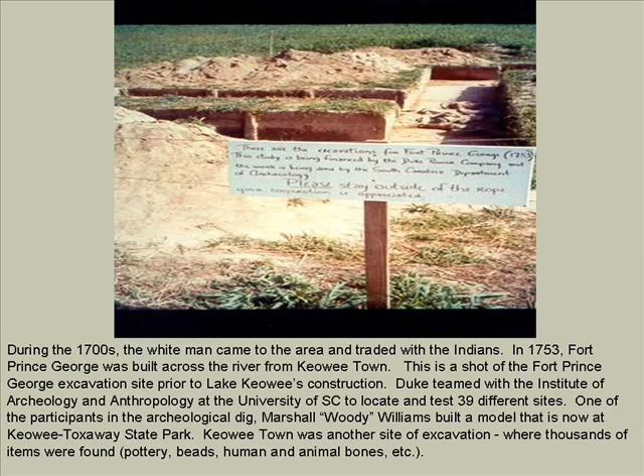Land purchases began, and South Carolina Land and Timber was formed for the purpose of acquiring, holding, and developing land and timber properties in 1963 and early 1964. The corporate name was changed to Crescent Land and Timber in March of 1966.

On Saturday, January 2nd, 1965, Duke's president, W.B. McGuire, held a luncheon press conference at the Clemson House and announced the company's intentions to obtain the necessary licenses and permits to build a large power-generating complex to be called the Keowee-Toxaway Project.

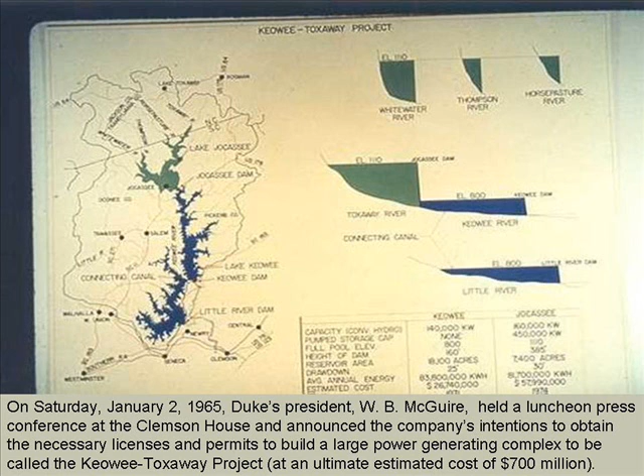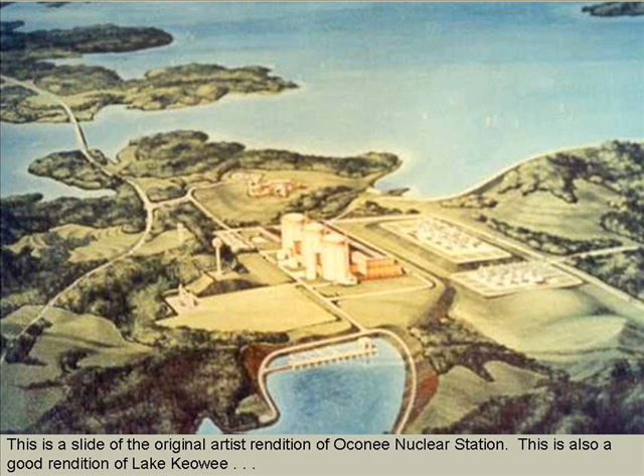In July 1966, Duke placed one of the largest orders for land clearing and allied machinery ever given in the two Carolinas with Jeff Hunt Machinery Company of Greenville, South Carolina, to clear the basins of Lakes Keowee and Jocassee. Clearing operations were scheduled to begin January 1, 1967.

In 1967 alone, the harvest of timber from company land being cleared for the lakes was enough to build over 2,800 six-room houses, and the pulpwood harvest was enough to fill 3,850 railroad cars. After an area was cleared, brush and leftovers were burned.

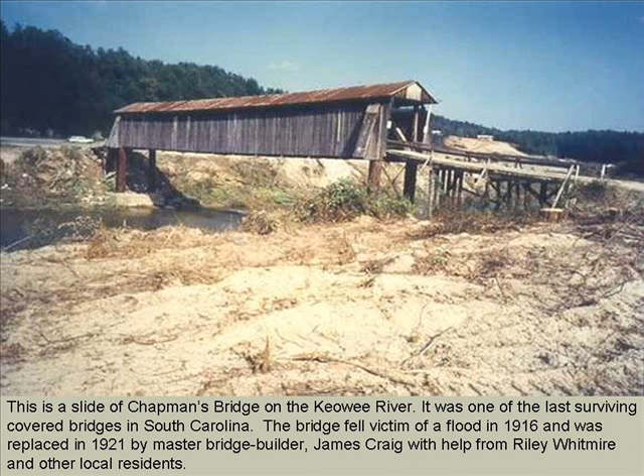This is a slide of Chapman's Bridge on the Keowee River. It was one of the last surviving covered bridges in South Carolina. The bridge fell victim of a flood in 1916 and was replaced in 1921 by master bridge builder James Craig with help from Riley Whitmire and other local residents.

Before Lake Keowee was flooded, Duke Power carefully dismantled and moved Chapman's Bridge to the Keowee-Toxaway State Park. Sadly, the bridge was burned and is no longer there.

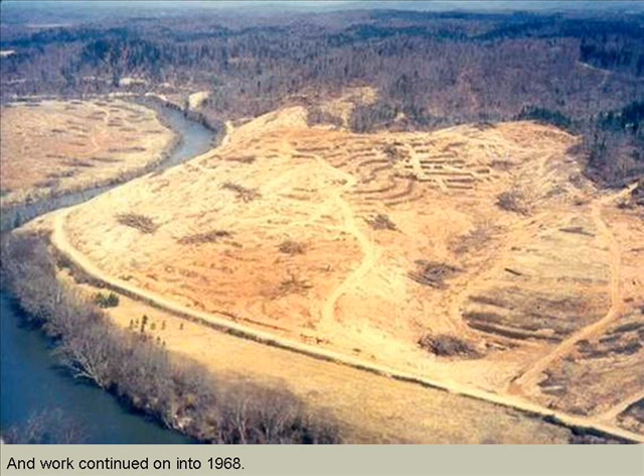Work continued on into 1968. Earth moving was underway. Lake Keowee would be formed by the impounding of the Keowee River and Little River.

The two arms are joined by a connecting canal. The Keowee Dam is twice as long as the other two dams in the project, at 3,500 feet long, 20 feet higher than the Little River Dam, but 215 feet lower than the Jocassee Dam.

The Keowee Dam contains 2 million cubic yards of earth and is 800 feet wide at its base, about the same length as 2 2/3 football fields laid end to end, and 20 feet wide at the top.

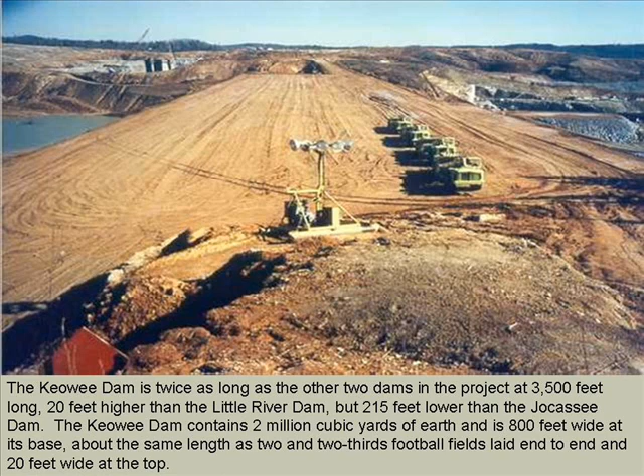The Keowee Dam will contain 2 conventional hydroelectric units capable of generating 140 megawatts. Keowee's tunnel is 800 feet long and 33.5 feet in diameter. The tunnel alone, when full, will contain 5.3 million gallons of water, with an average flow of 1,000 cubic feet per second.

152 cubic feet was the lowest stream flow calculated on the Keowee River, so Keowee Hydro Station has no problem maintaining the flow of the Keowee River.

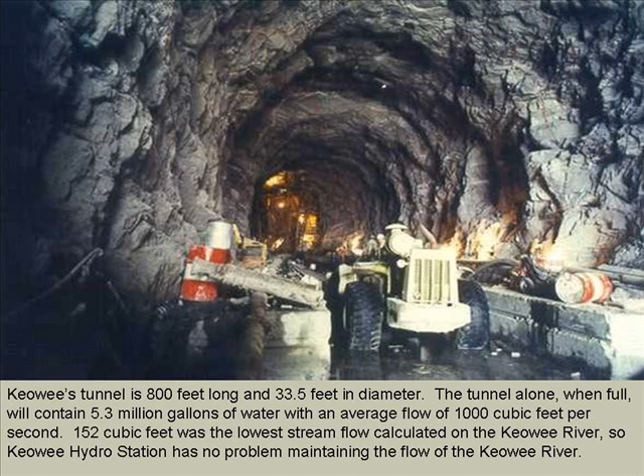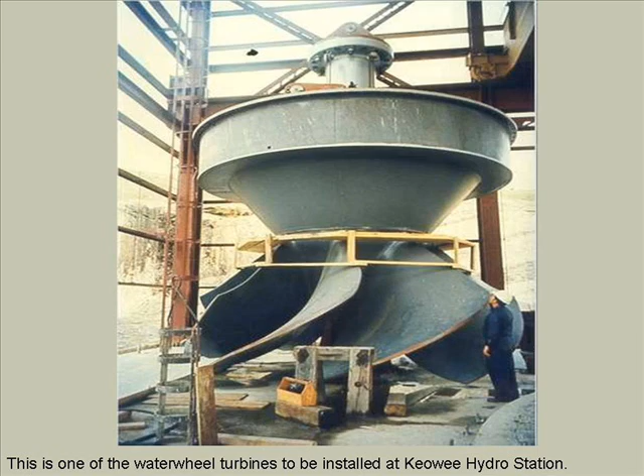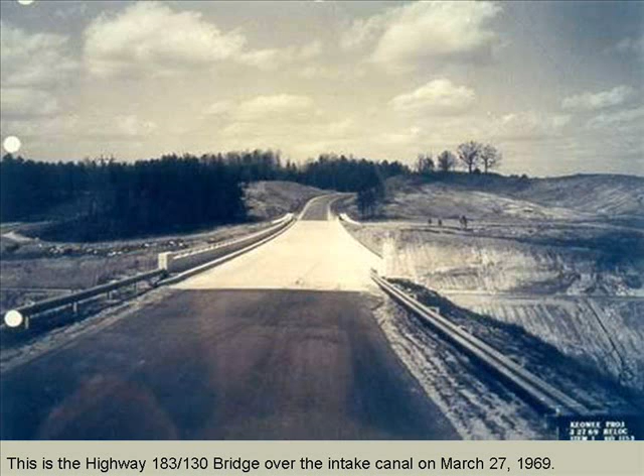This is the Highway 183-130 bridge over the intake canal on March 27, 1969. This slide was taken in April 1969. The hydro station's construction work is in progress.

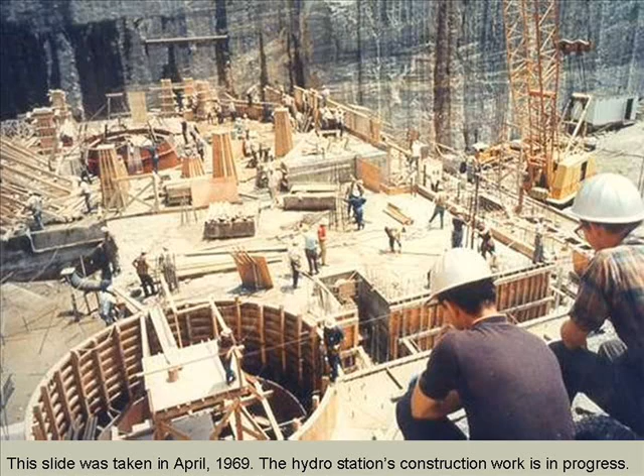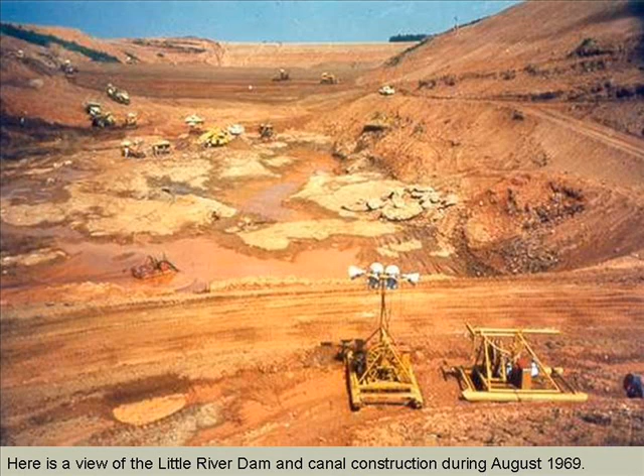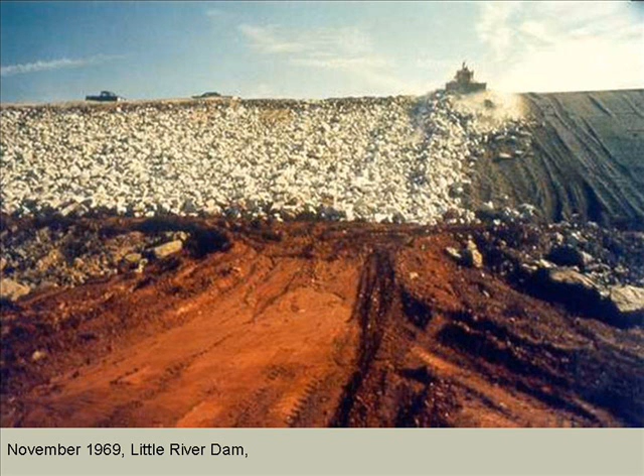Lake Jocassee and the Jocassee Hydroelectric Station were also being built during this same time. Construction began January 25, 1968, and the impoundment of Lake Jocassee began in mid-April 1971.

Water is fed into Lake Keowee from the Jocassee Hydro Station. The initial transfer of water from Lake Jocassee to Lake Keowee occurred in December of 1973. The Jocassee Hydro Station began commercial operation December 19, 1973.

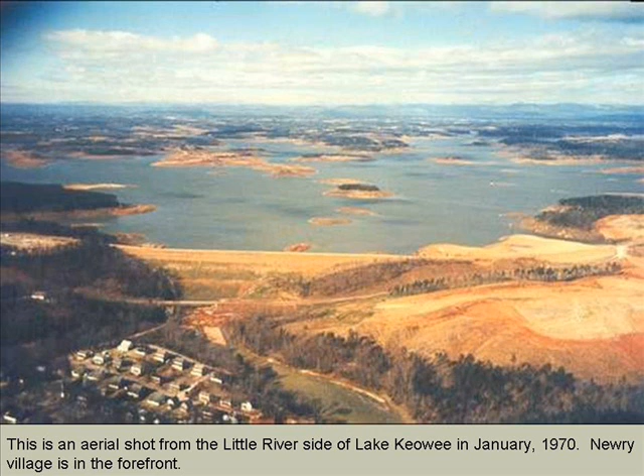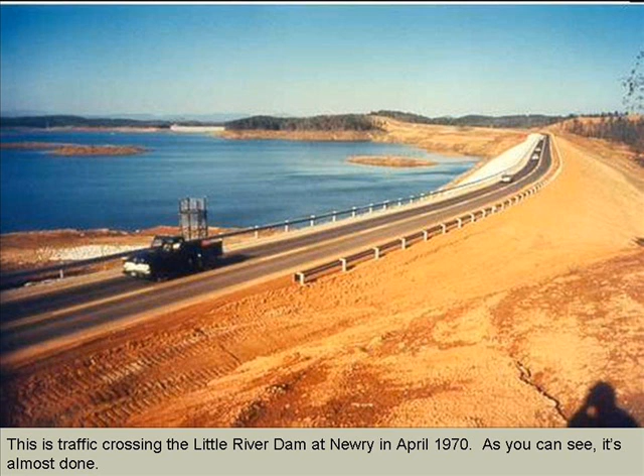This is traffic crossing the Little River Dam at Newry in April 1970. As you can see, it's almost done.

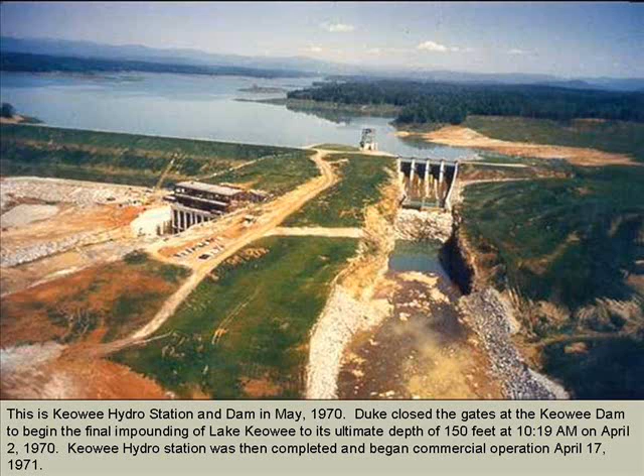This is the Keowee Hydro Station and Dam in May of 1970. Duke closed the gates of the Keowee Dam to begin the final impounding of Lake Keowee to its ultimate depth of 150 feet at 10:19 a.m. on April 2, 1970. Keowee Hydro Station was then completed and began commercial operation April 17, 1971.

It was completed and began operation in 1973. Oconee Nuclear Station has generated more electricity than any other nuclear station in the country.

Lake Keowee is truly a beautiful lake and a rare treasure for Oconee County and its residents. We at Duke Power hope you enjoy many more of the beautiful Keowee sunsets and recognize that we take our environmental stewardship very seriously. We also ask for your help in keeping Lake Keowee's tomorrows as clean and beautiful as it is today.